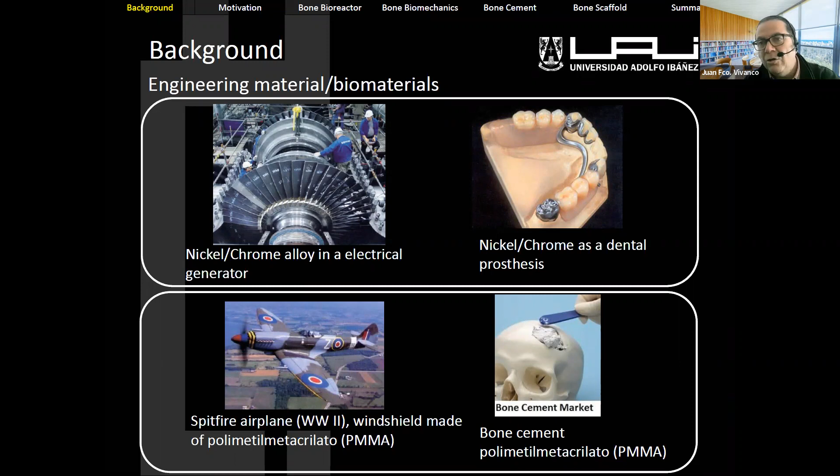So what I want to say here is, sometimes in traditional engineering, we develop some tools and materials that have crossed over to more biological applications, as in those examples. And similarly, in the traditional classes that we have in mechanical or civil or mechanics of materials, we understand the concept of studying specimens in tension, compression, bending, with some standards, and we can determine some mechanical properties.

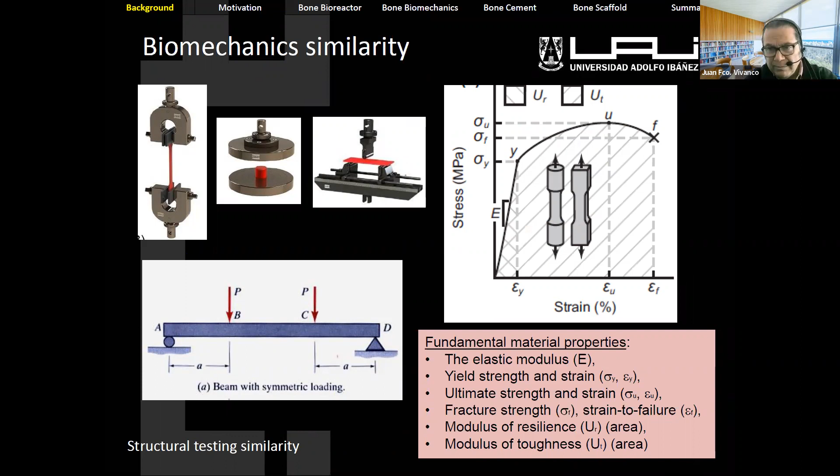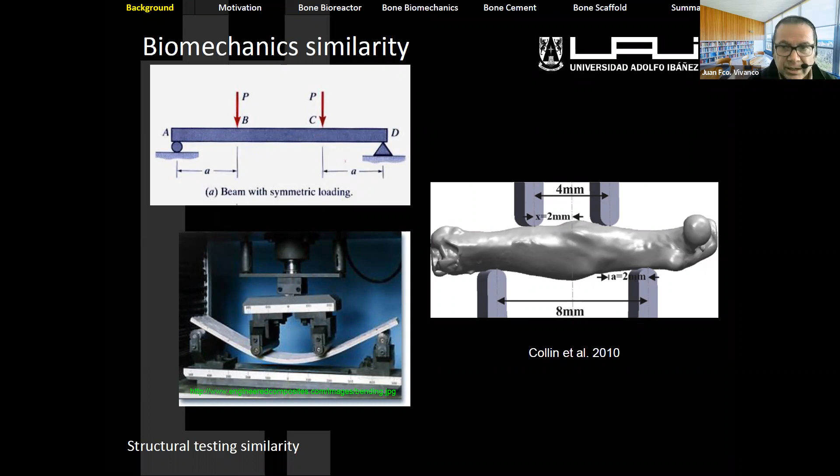The same idea, people study those properties, but in other applications. We can see in the right picture that is a scanning of a mouse bone. We can see that it's totally different. The cross-section is not regularly changed, but with the same mechanical approach, the traditional engineering, we can determine some properties as well.

Other application that we face, especially in civil engineering, in the asphalt materials: it's very common that we observe the rutting effect in summertime, and in winter we observe cracking in the highways, in the asphalt materials. That behavior happens because that particular material, the asphalt, is a viscoelastic material. Similar behavior we observe in natural bone. By the way, all the human body is made of polymer, and asphalt is a polymer.

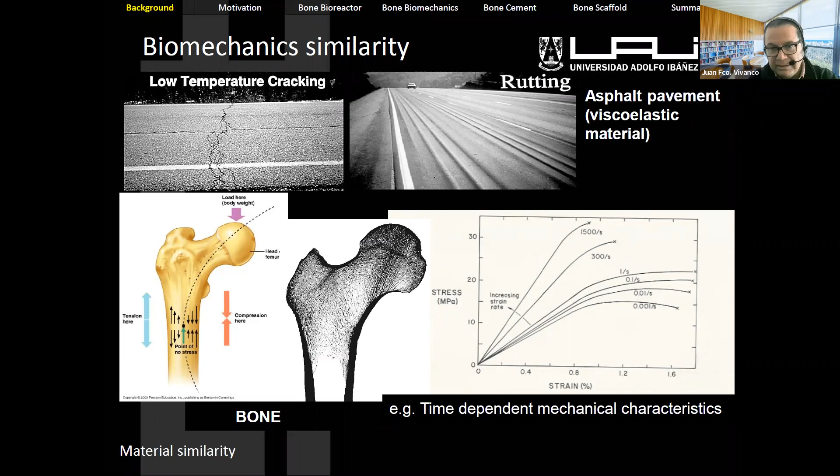So the same concept that people study in viscoelastic materials such as asphalt, people study also in bone mechanics as a material. People in mechanical engineering will understand that effect better. That basically is a time-dependent property.

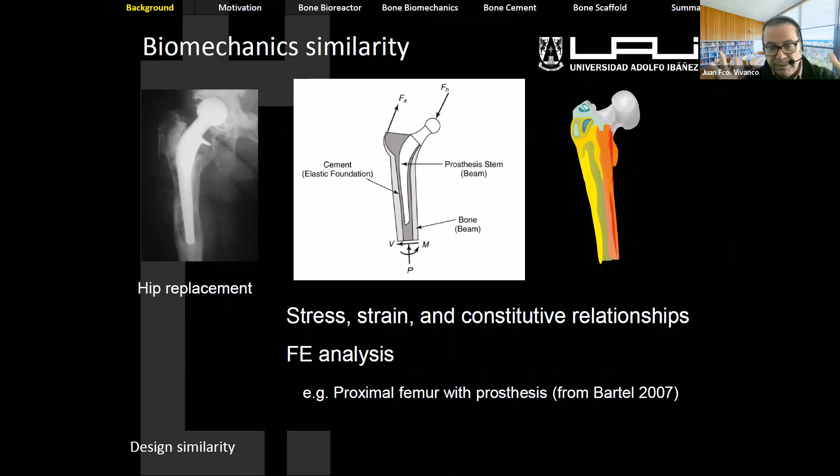And also in some areas in traditional engineering, there are computational models based on the finite element method that are very well established. A similar approach people use to design implants, with the same concept of stress, strain, constitutive relationship, all that finite element simulation, which is a virtual experiment, to design implants and other designs as well.

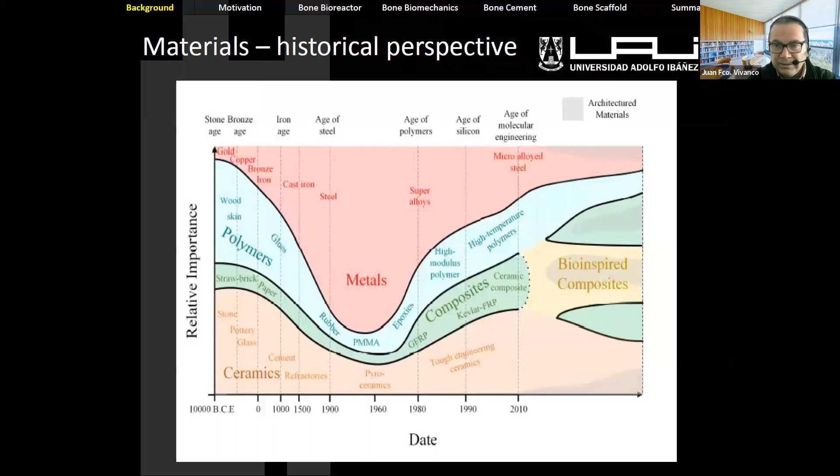And talking about the perspective of the materials used nowadays, generally speaking, we have polymers, ceramics, metals, composites. Plus, there is a new area that is very appealing to design and create things. Bioinspiration is how nature gives us ideas to design engineering applications.

For instance, self-healing materials that are used nowadays to regenerate cracks in pavement, cracks that we can observe in roofs. The concept behind is how the remodeling part of the fracture healing process happens in bone. So this gives us an idea of how we can understand nature, the biology, better, and transfer that knowledge to the engineering world and vice versa.

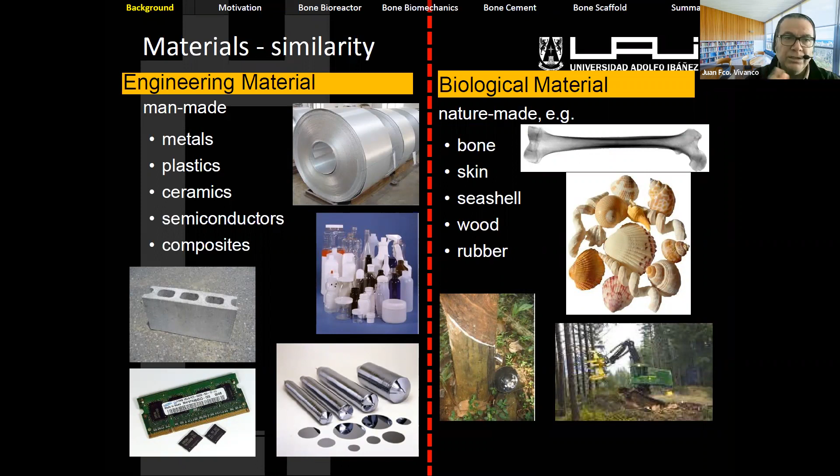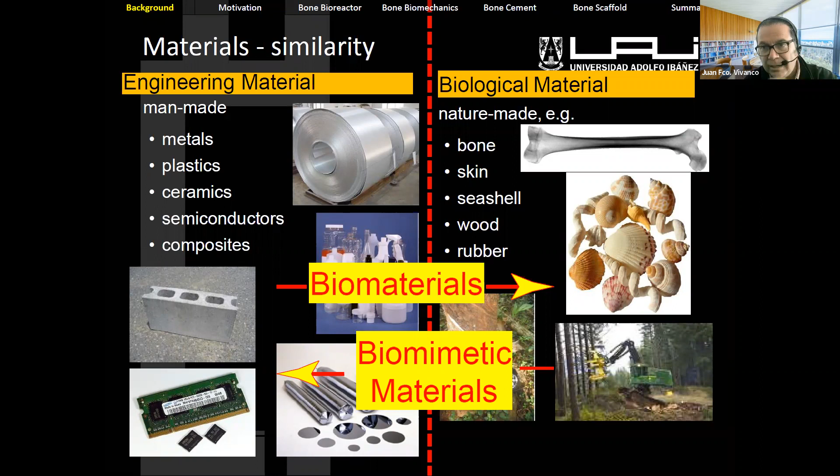So generally speaking, in traditional engineering we talk about engineering materials, man-made materials. And when we copy the effects of biological materials to engineering materials, we call them biomimetic materials. Both are in the concept of bio-inspired biological materials. The picture on the right shows bone, some seashells, trees; those are very interesting materials, full of capacity to understand, and more sustainable in general.

So one of the materials that is very important in different areas, in aerospace engineering, in mechanical engineering, as a smart material because of the way it can sense external stimuli, is bone. Bone mechanics is a very well established area, and bone, in its skeletal functions, has mechanical properties plus metabolic properties. All the blood cells are formed in bone, plus bone is a big bank of calcium and phosphorus. Osteoporosis is a disease that happens because of an unbalanced situation of those elements.

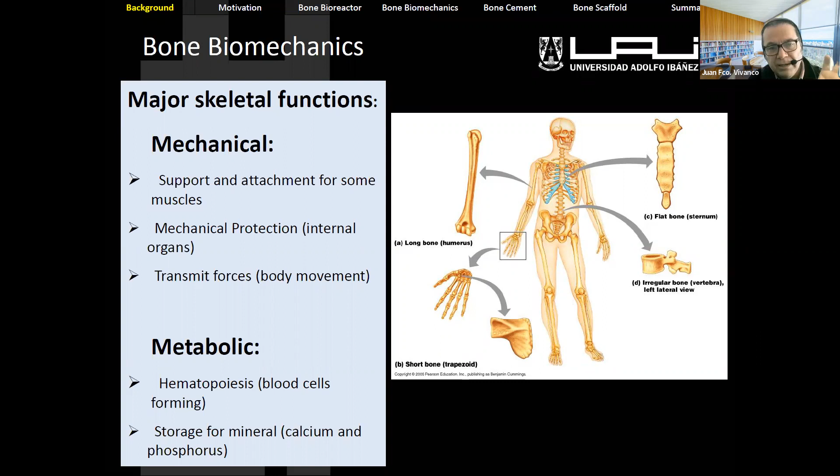And from the mechanics perspective, bone mechanics gives us all the concepts of mechanical protection, the forces, all musculoskeletal movement and such. But for us, the idea now is to understand that bone provides mechanical and metabolic properties, plus as a material, it's a composite material.

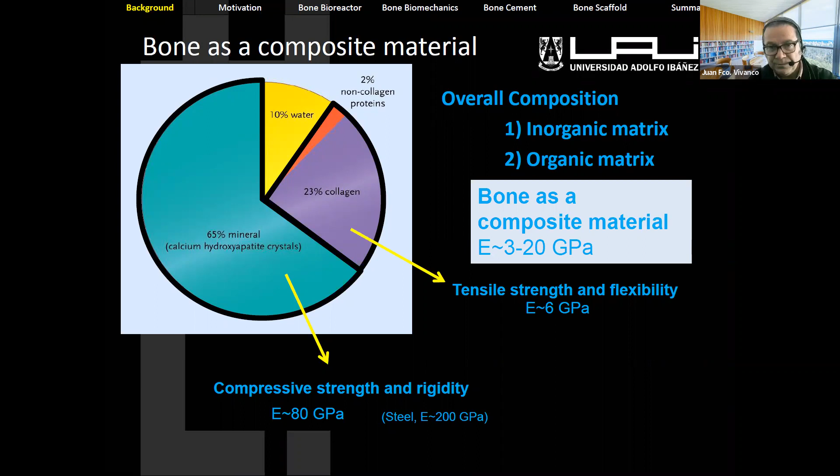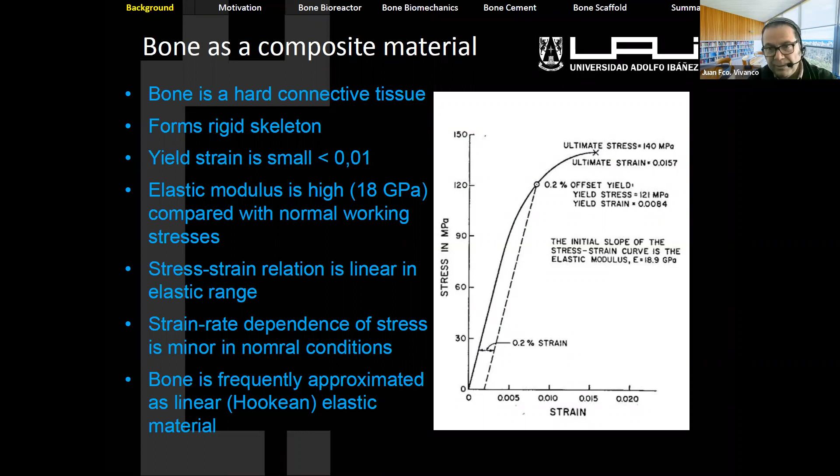Sometimes people compare bone to reinforced concrete. The regular concrete is the mineral part of bone, in this case a calcium hydroxyapatite material, and the steel part of the reinforced concrete is the collagen. For us, it's a composite material with basically those two phases. And bone as a traditional material can be studied with the same stress-strain relationship, and a lot of work is happening to understand different parameters of those mechanical behaviors.

For bioengineering applications, one of the unique things about bone is its super efficient, porous structure. And when we say efficient, it's because it's very light but at the same time very stiff, and can provide unique properties that can be applied in different engineering applications as well.

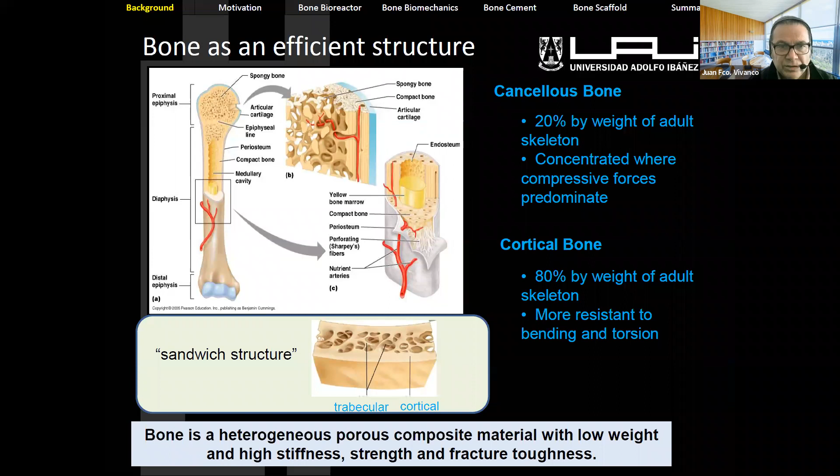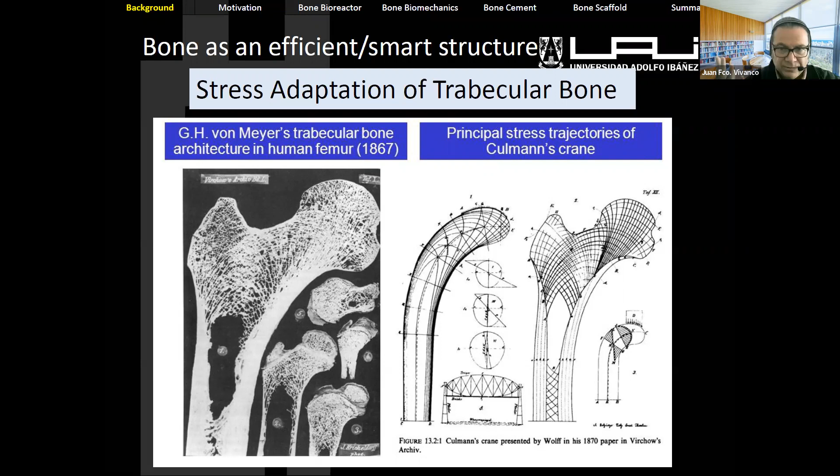What I'm showing here is one of the earliest works where people in biology collaborated with people in civil engineering. We can see on the left side an image of how the trabeculae of the human femur are oriented, and on the right side a crane, showing how the internal principal stresses are distributed in that crane. That was one of the first works where people in traditional engineering started working with people in biology to understand the internal effect of the adaptation of these natural materials.

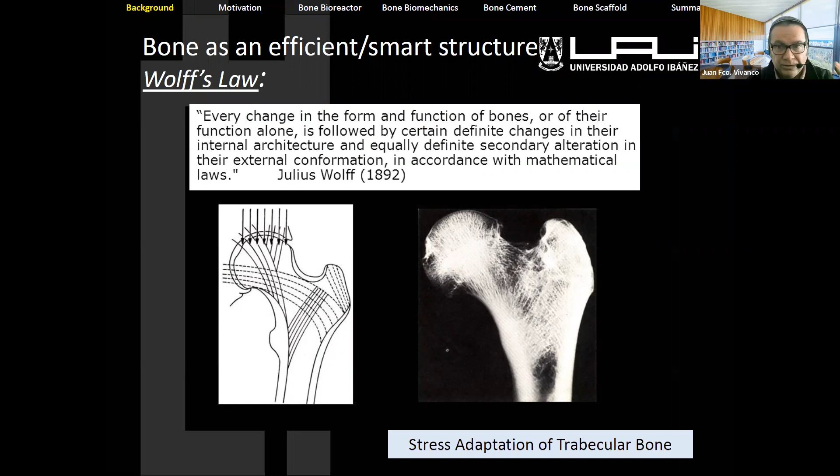And nowadays people follow different concepts of stress adaptation. Wolff's law, by the end of the 19th century, described the unique, efficient, and smart sensor of the bone itself. Also, bone is a hierarchical structure like other natural materials, and has unique properties because at different levels, going from the nano level, micro level, to macro level, there are individual structures, and that also creates unique properties as well.

And one of the main differences when we talk about artificial or man-made materials versus biological materials is that biological materials are living materials, and particularly in bone there are cells that provide that activity. I'm not going to give details here, but in general there are cells that form mineral, other cells resorb minerals, and the other cells, the osteocytes, are the ones that communicate the signal that's happening when you get the external force.

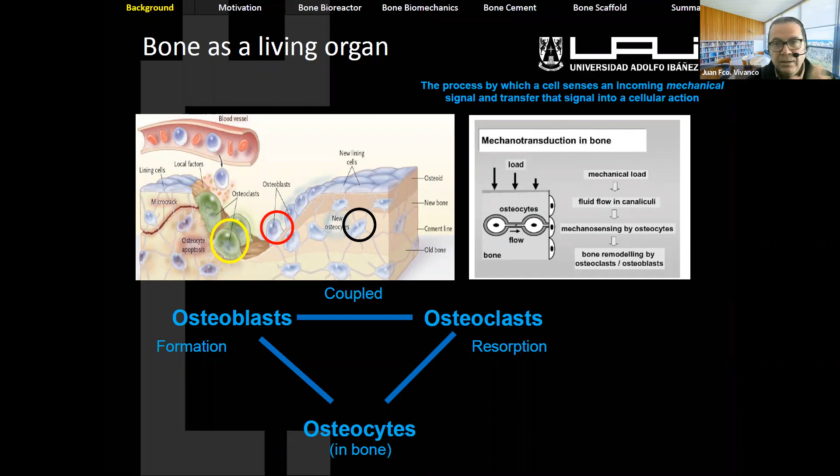And if we extrapolate all this to public health, one of the main motivations, especially in the United States, is that every year around 30 million people suffer from musculoskeletal injuries. And I say the US because the US has good statistics and the public health sector is very well developed. In the countries from Mexico to the south, the public health system doesn't cover the diagnosis to evaluate those problems. So we are facing a similar situation to what the States faced in the 50s.

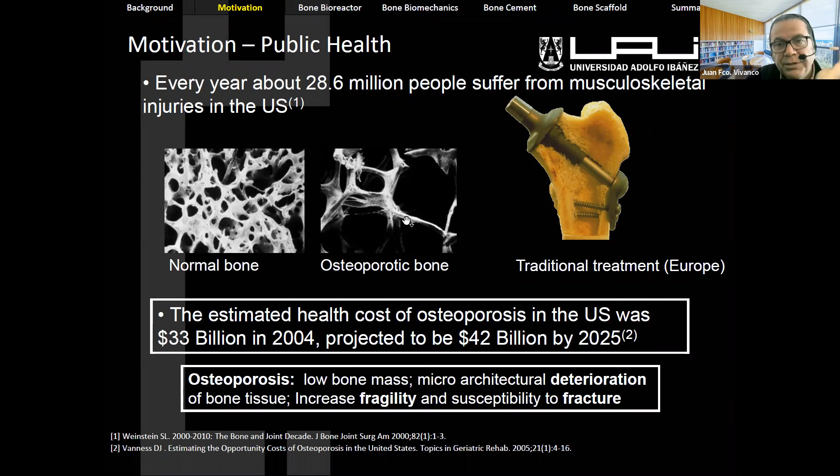And the technological motivation: there is a new area that was created in the States, called tissue engineering. It's a multidisciplinary area using the concepts of engineering. As engineers, we're very good at designing, manufacturing, and studying complex structures. We are very good in science, math, and physics. And in biology, people understand very well all the processes, cells, and interactions with different cascade events.

So the combination of cell biology with engineering, particularly biomaterials and biomechanics, has been an alternative to traditional tissue repair to provide a good solution, but still we are not there yet. So there are needs to design organs, there are needs to design more materials to provide solutions that are not covered nowadays.

And one of the key things that we study in South America is: we think we have good science, we think we have good professionals and studies, but why are we not relevant in the international concert of research? Particularly in orthopedic applications, only 1% of high impact research is conducted in South America. And there are several studies that mention some limitations. I'm going to mention just 3 of them.

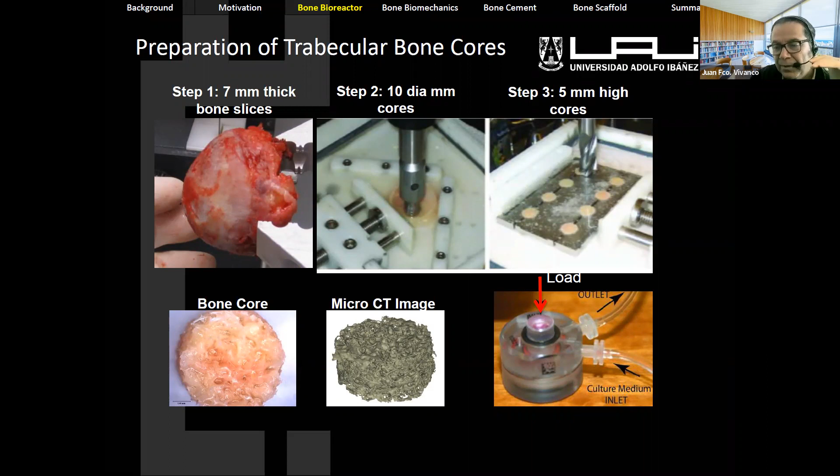So here, sorry, you guys might think that it could be a little gross, but it's a non-human femur that we can process, create some bone cores, and with that bone core, we can create these cylinders that can be imaged with microcomputed tomography, and then we can put them inside that bioreactor and conduct that one-month experiment and evaluate different conditions. Some cylinders are rested, others are dynamically stimulated every day, similarly to how you guys go to the gym. And after a month, we observed that one of the properties, called elastic modulus, that is basically the stiffness of the structure, increased after the three-week experiment under the loading condition.

So with that model that was established at Wisconsin University, I was part of that study as well. We could show that the ex vivo model can be an alternative to do an ex vivo experiment before going to in vivo or clinical application, to isolate some factors in a controlled way.

This is another work that we did with a cancer research institute. They were doing some genetic studies in mice to replicate what happens in humans. So they have two types of groups: natural mice, they call the wild type. In genetics, wild type is just the natural, and the other group of mice were with some genetic condition called the Pten block. So they want to evaluate how that particular genetic condition affects when you break your bone, and how is that healing process. So compare the control versus the one with the genetic disease or modification. So people from bone biology, from cancer research, they are very good at understanding those effects.

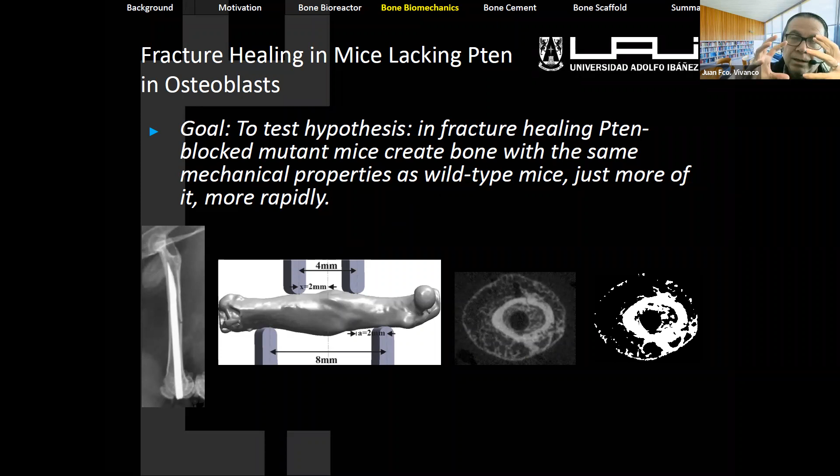So at the end, they fracture this femur of the mice, and they want to evaluate with engineering tools whether, since the Pten block mice created more bone tissue, that bone was only amount or also quality. So at the end of the study, we did some techniques that are very well established in engineering, with imaging, with mechanical testing, cross-section, and evaluating different things. At the end, we concluded that the main difference is just the amount of material, but the quality is the same type of material. And that was an important thing for people in genetics to understand and to continue doing some biological experiments to understand that effect.

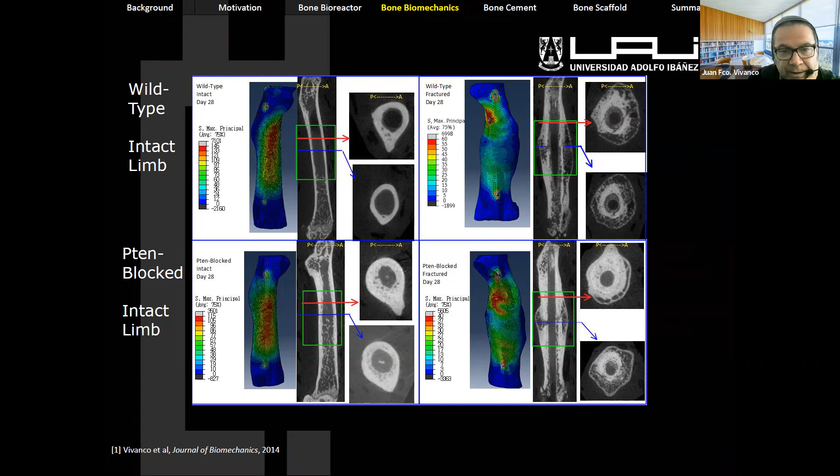This is another big project as well that we conducted with surgeons in spine, trying to analyze the implant. Well, this is a typical implant that you put in a column in the spine. Sometimes the implant is too rigid, it's too stiff, and can deform the vertebra underneath. So they want to understand with engineering concepts how we can solve those situations, maybe designing a structure that is more porous, or maybe changing the materials, and using the clinical approach as well.

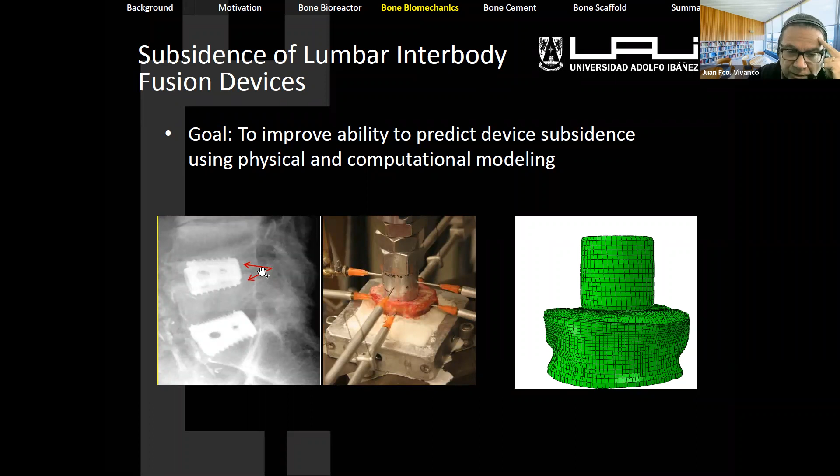So at the end, what we did was, we wanted to solve that problem, but we ended up developing some new methodologies in that area, basically coming from cadaver specimens, doing some clinical scans. With that scan, going to a typical segmentation process.

You take the image, you clean the image, then with that segmentation process, send the file to a CAD software application, and then with that CAD design, we can send it into this virtual analysis for finite element applications.

And one of the unique things here is that using the pixels that you get from the medical image, we can correlate with regression models the density of the pixels, and instead of using just one single material as an input for those models, we can assign more realistic mechanical properties to each pixel, creating a more heterogeneous structure for finite element analysis.

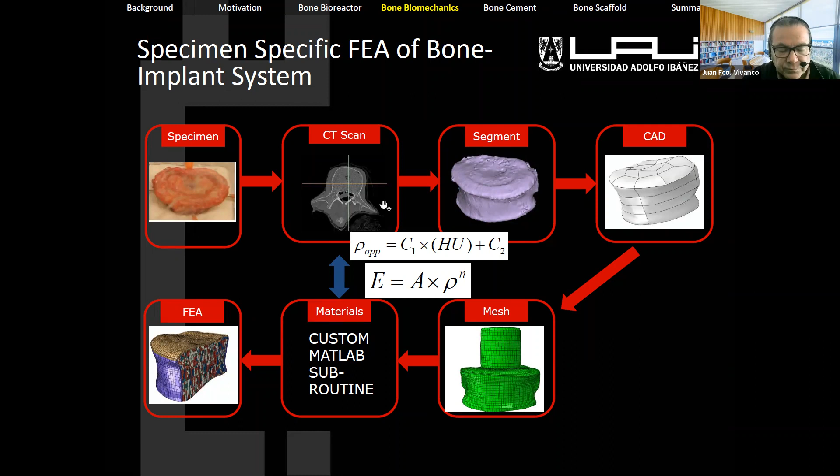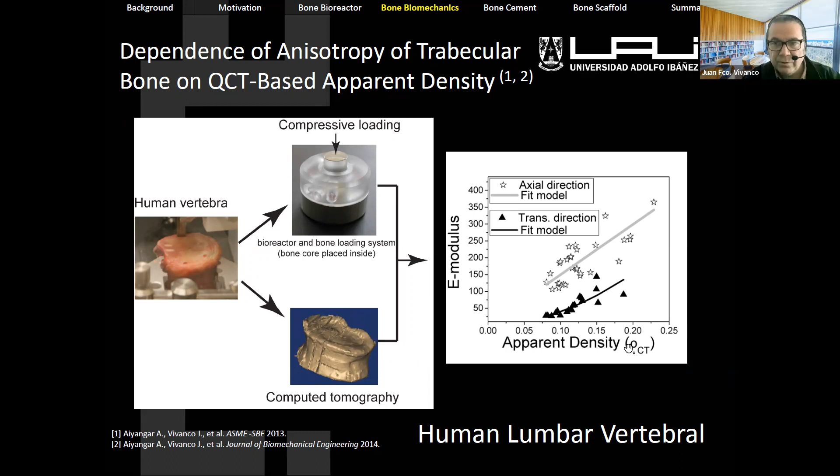People in different countries are using this whole process as well, but we created this to understand better what the effect on the vertebra is when you design stiffer column implants. So here I can show you more results of that. This was a human cadaver vertebra, the process, all the imaging, and all the relationship between density and elastic modulus that are important from the clinical perspective, plus all the mechanics happening there.

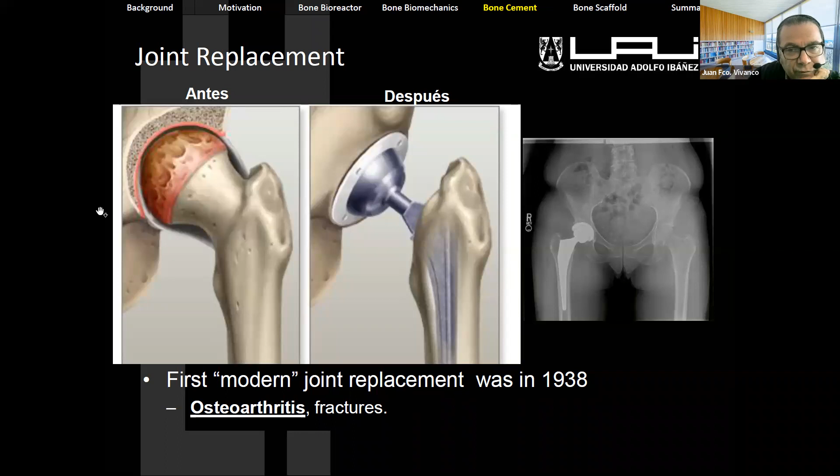Another project is in joint replacement. The first modern joint replacement was in 1938. Nowadays in Western culture, the typical joint replacement is very well established. What I call Western culture, from the United States all the way to Chile, the way people do this is the surgeon, before putting in the implant, puts a layer of bone cement, and the bone cement is a material that allows the implant to be totally glued to the natural tissue, and that bone cement is around 3 to 5 millimeters thick. And one of the main problems is infection.

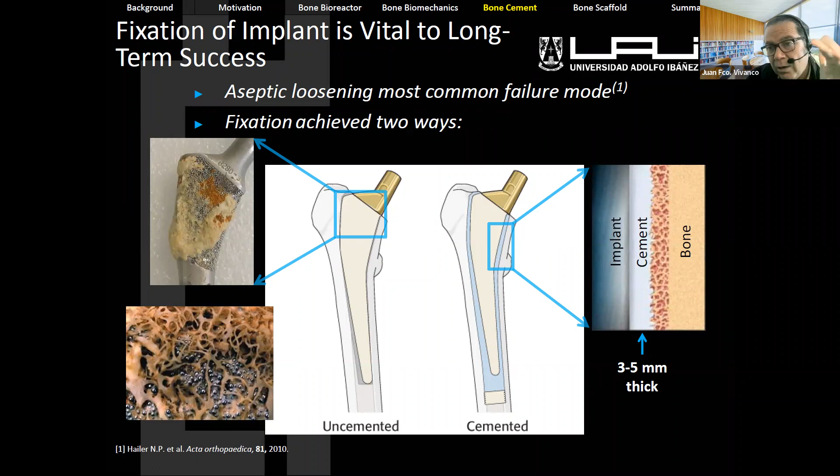So what people usually do is put in some antibiotics, but antibiotics are difficult to control when inside the body. So there are different alternatives that people are using nowadays for infection. And one of those, the one we are trying here, is using nanoparticles with antibacterial properties, without compromising the mechanical performance.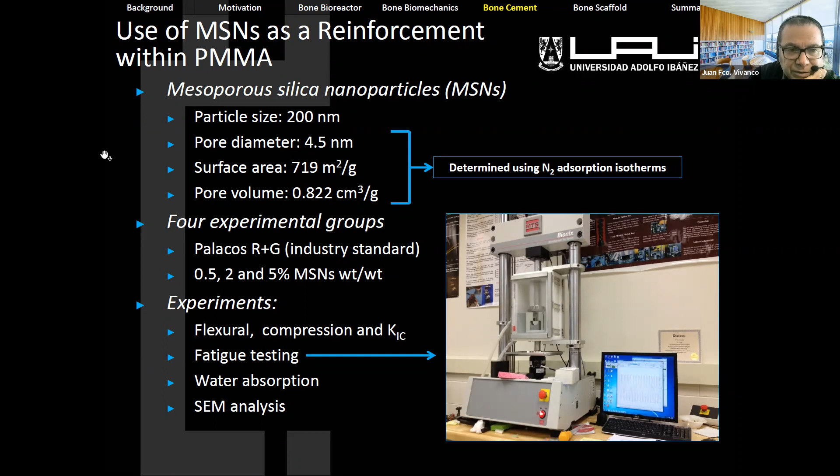So here we did different studies with different nanoparticles. One of those was silica nanoparticles. Then we continued with silver nanoparticles, and we were going to continue with copper nanoparticles, but we didn't continue with the copper one. Coming from Chile, copper is one of the main things that we do research on here. This is in vitro. All this study was in in vitro conditions, creating bone cement with those particles. A lot of study from materials science, chemical engineering, and mechanical engineering as well, with different conditions.

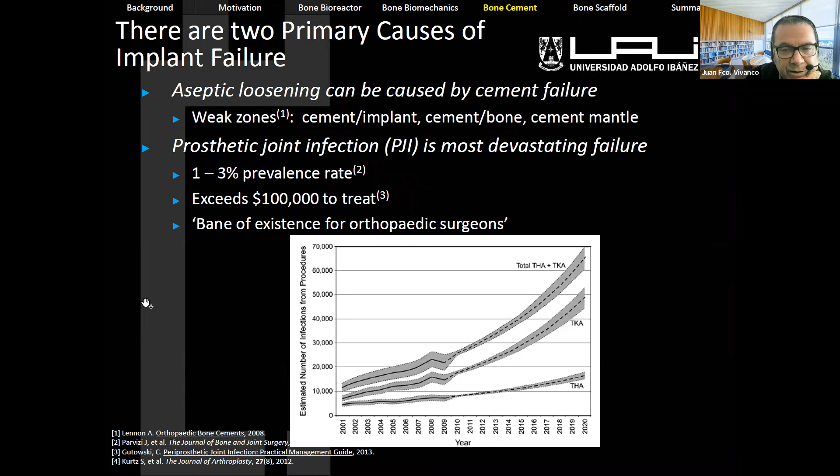So in the end, with the nanosilica nanoparticles, we did different evaluations, including mechanical. In the mechanical area, we studied an effect called fatigue, when you have cycles of loading. And what we found is that increasing the percent of nanoparticles doesn't necessarily increase the fatigue properties the same way. Actually, it was the opposite. Then we did some antibacterial studies, and evaluated the bacterial resistance, and those nanosilver particles are very well established. And nowadays, I don't want to show those results, but we're trying to use natural materials to create nanoparticles that also provide these antibacterial properties.

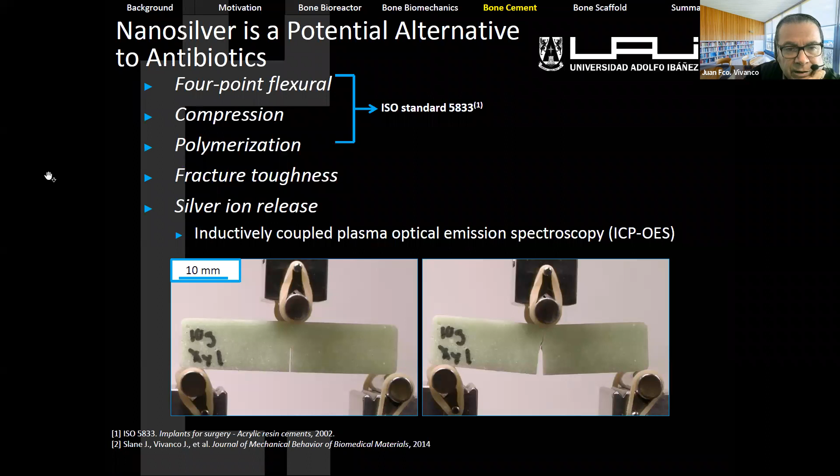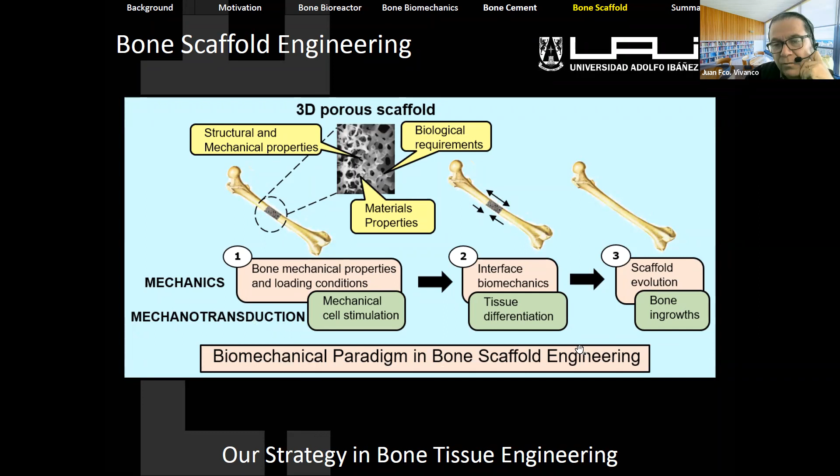That is the paradigm. So that is our approach in our lab. What we're trying to do is focus our study on that artificial structure that has material, structural and mechanical properties, and some biological requirements, and study it with two approaches, from the mechanics perspective and from the biological perspective, which is mechanotransduction. That approach is basically using the biomechanical paradigm for bone scaffold engineering.

And we use cells as well, stem cells. Some people say you can use the cells directly for the patient. We don't go down that path. What we do is we take natural tissue, and in the lab, we establish protocols so that we can recover the cells.

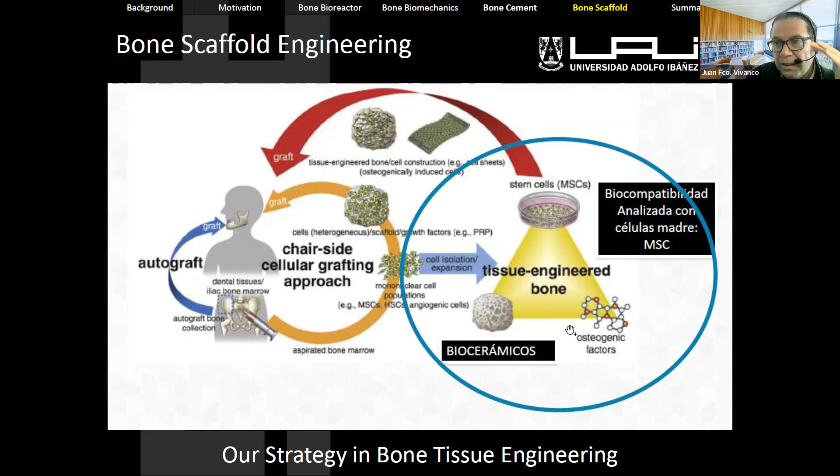I'm going to explain later a particular example of that. And we can create all the cell culture in an in vitro condition. And this is our strategy to design these artificial structures, and we divide it in three main categories. One is designing these areas and these structures. We can do simple design, we can do design with gradients, all the topology, all the math behind it when you want to create those more sophisticated geometrical structures.

The second part is the fabrication. For the fabrication, we have also developed different methodologies to fabricate with bioprinting, changing materials, to better understand the additive manufacturing process during printing, all the thermal aspects, all the rheology as well. And at the end, the assessment. The assessment we divided in two areas, the engineering domain and the cellular molecular domain.

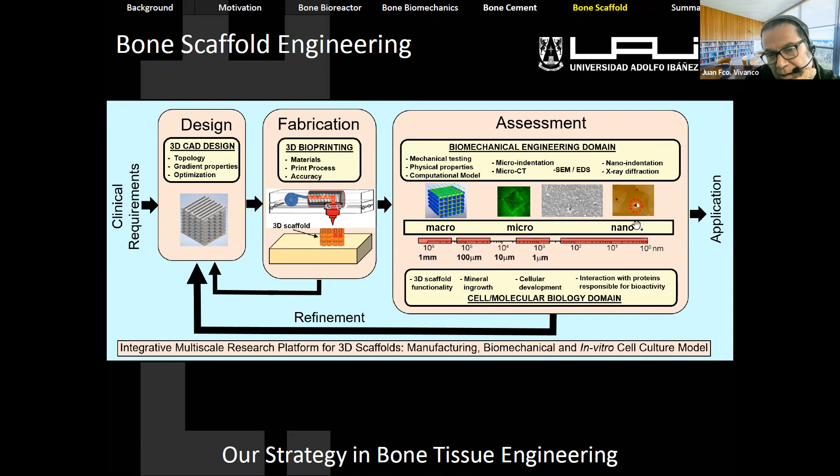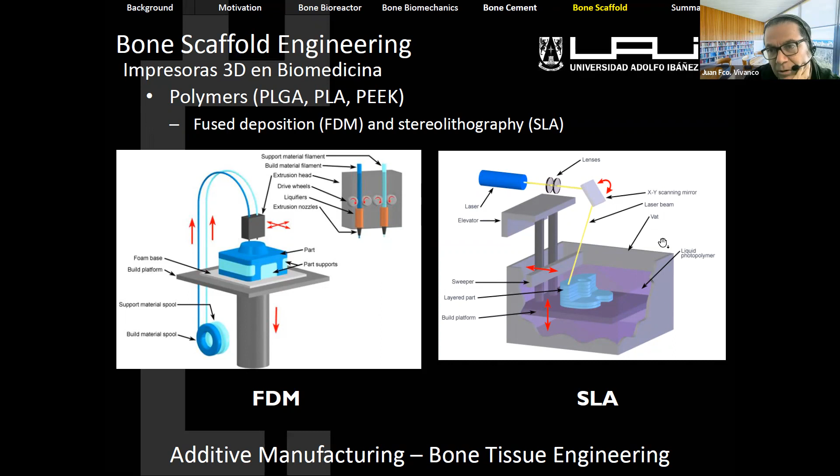And we have a bunch of tools and equipment to study those domains, and their integration gives us a platform to study those 3D structures with in vitro cell culture models for clinical applications. So talking about additive manufacturing, we use FDM, which is the typical filament. We use different filaments, we create our own filament with recycled materials, sometimes with biomaterials, plus the stereolithography system. We also use one of these SLA printers.

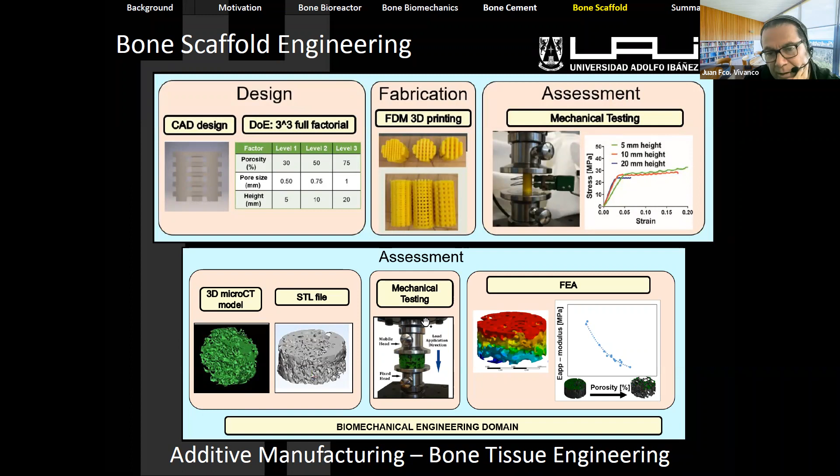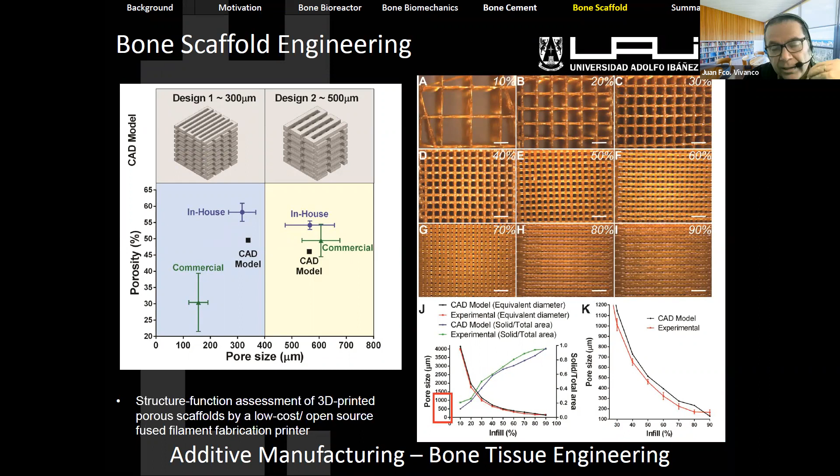And here I'm showing typical analysis that we do. We design, fabricate, do some mechanical testing, imaging, micro CT imaging to create those virtual models, combining mechanical testing with simulations, changing some parameters. And we care a lot about low cost equipment and low cost material, but in a smart way, trying to replicate and have very defined internal structures.

This is a collaboration with some people in Switzerland. We have access to this expensive equipment called a bioplotter. In the bioplotter, we combine bioglass with clinical based polymers, and a lot of parameters can be controlled to finally get a structure like this one. Here we have a scaffold with different porosity and different materials. These are for clinical application, particularly with PCL, a special FDA approved polymer, with some bioglass, and the bioglass particles are bioactive particles that promote bone integration.

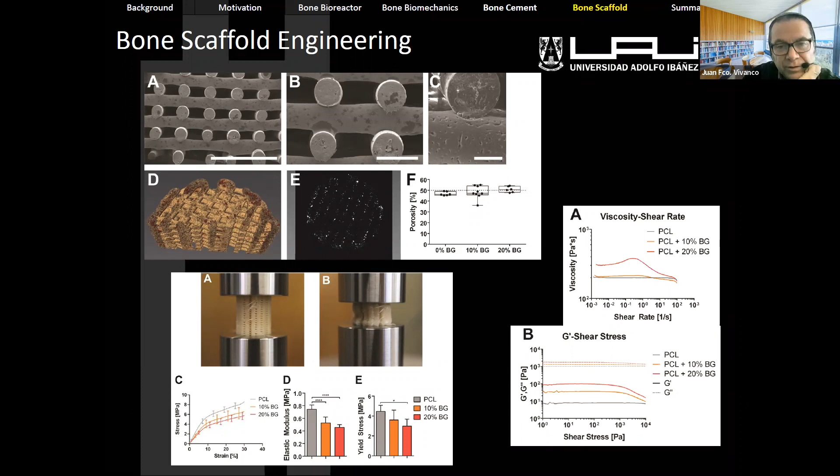And for all the engineering concepts behind that, we take imaging from microscopy and micro CT to understand the accuracy of the process, conduct mechanical testing to understand how some important parameters change, plus the internal factors in the rheology. Since it's a thermal printing process, there are several factors like viscosity, G prime, G double prime. People familiar with those factors understand better, but it's basically rheology when you study something in a liquid state during the manufacturing process. That is very well established in our lab.

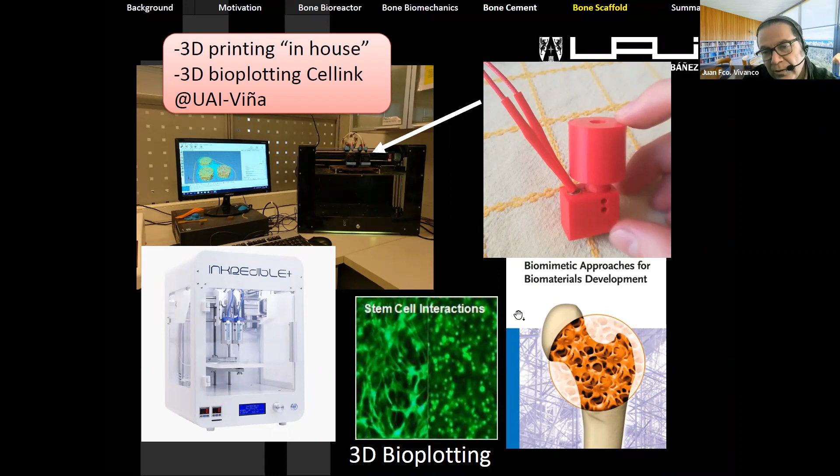And we create our own printers. We develop some sensors to improve the thermal conditions. We can melt some plastics and polymers at higher temperatures. We have other biological printers as well, like the Inkredible one here for hydrogels, and we interact that with stem cells. We have a special protocol to develop some stem cells that I want to show you.

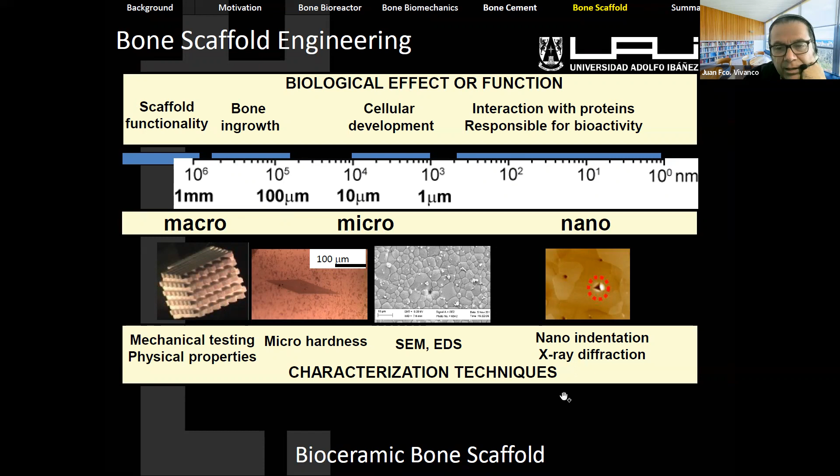This is another application scaffold, but instead of polymer, it's made of ceramic. We did a bunch of experiments at different scales, nanomechanics, micromechanics, and macromechanics for the mechanical part, plus all the cell analysis. Here are some results. What is nanomechanics? Basically, with a very tiny indenter, you determine some properties of your specimen at the nanoscale with protocols that are very well established in electronic materials. We can determine those properties as well.

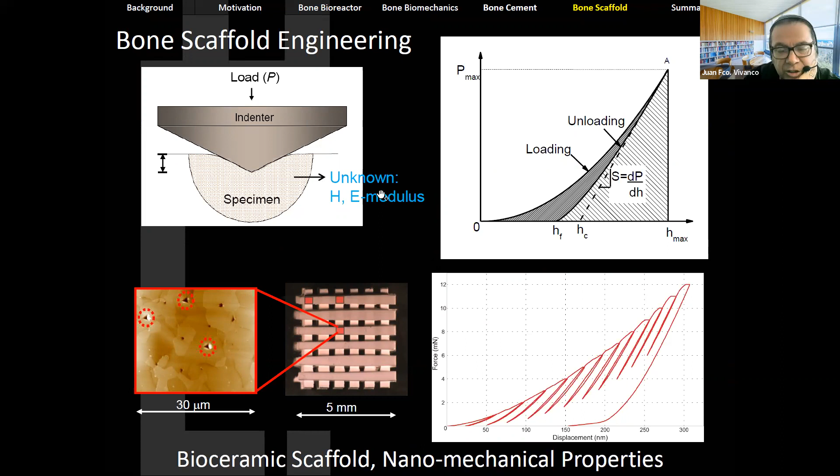And going more toward clinical application, we developed special procedures. The gingival tissue is the tissue that, when you go to the dentist to take out a tooth, goes to the garbage. Instead of going to the garbage, we take that tissue and we developed a special protocol that other people have used around the world. In that case, we collaborate with people from Europe.

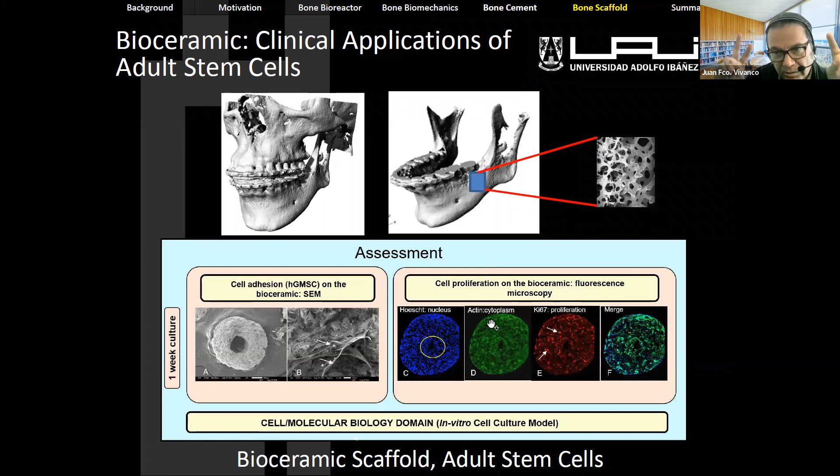In the lab, from that gingival tissue, we can get adult stem cells, and with those cells we can continue doing different biology studies to evaluate cell proliferation, cell adhesion, cell differentiation, going to bone cells as well. And we have very well established this cheap way of getting tissue for those cell applications.

That's basically the main areas that I want to share with you guys. And I want to say special thanks to this group. B3MAT is a research group with more than 20 people, faculties, students, graduate students, people from other countries as well. It's called Biological, Bio-Inspired, and Biomaterials. And we're trying to find different ways to give value to natural materials to provide some solutions that sometimes are super difficult to find, especially in Latin American countries.